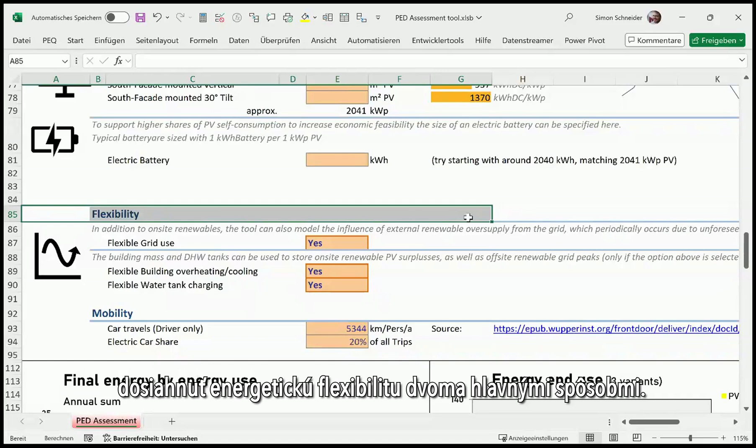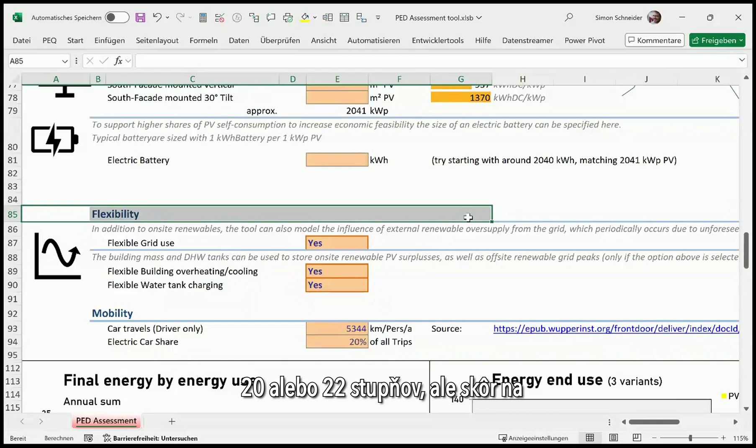So in this tool, energy flexibility can be achieved in two major ways. One is by overheating and cooling the buildings to a higher degree than would otherwise be necessary. This, for example, means in wintertime, not just heating the indoor temperature up to 20 degrees or 22 degrees, but rather heating it up to 23, 24, 25, even 26 degrees, because and only if there is an excess of renewable energy in the grid currently.

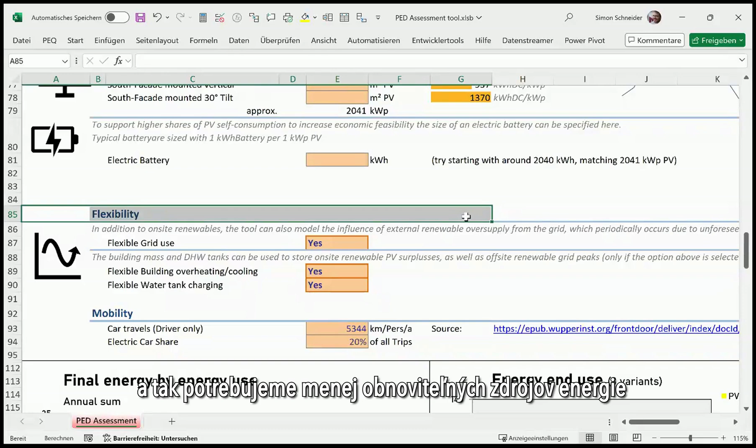Because even in winter times, there are times where it is sunny, where there's a lot of wind, where there is an excess of renewables, and we can store these excess renewables by overheating our buildings. And in summertime, it's even better because then there's typically even more renewable energy available, and we can pre-cool the buildings during the day when there's a lot of renewables available, so that we need less during night and times of lower renewable availability.

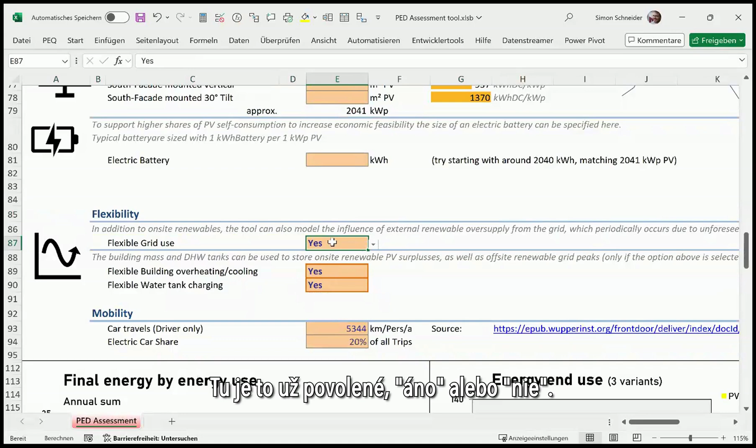The way you can use these strategies in the tool is here by, first of all, principally enabling the flexible grid use option. Here it's already enabled, yes or no. And then there's these two major strategies. One is to overheat or overcool the buildings in times of excess renewable availability. You can say yes to that. And the other thing is using the hot water tanks to increase their temperature as well if there is an excess of renewables available.

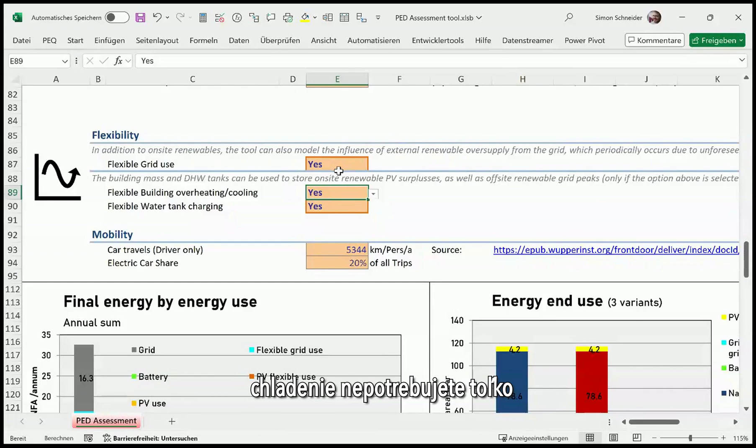Now, keep in mind, these systems only work if you have a district that uses electricity for heating and cooling, meaning if you have a heat pump based solution. If you have solutions that require district heating or even natural gas, then you cannot use grid flexibility in the same way because you don't need as much or barely any electricity for heating and cooling.

This is also why, if you include these options, you will see here these cyan colored bars that represent the flexible grid use, meaning the amount of electricity drawn from the grid only in times where there is an excess of renewable energy.

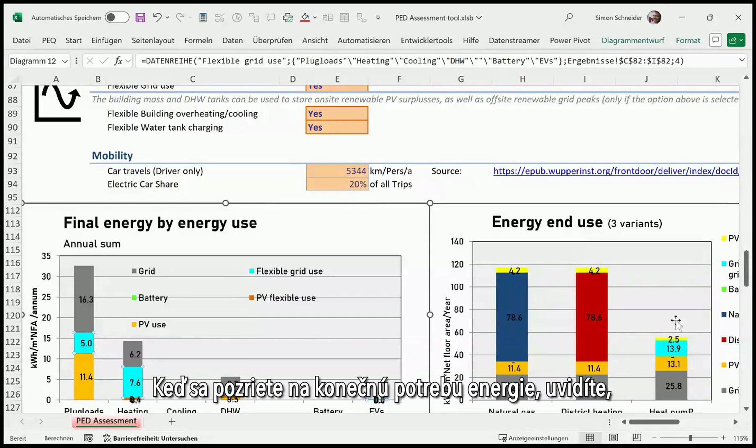And you will see when you look at the energy end use, where you have three variations and scenarios compared directly: one is natural gas, one is district heating, and one is the heat pump solution. You will see that it will only affect the heat pump solution.

And here, for example, you can see how much of an effect it has, because almost a third, or let's say a quarter of the entire energy demand for the heat pumps of the heating and cooling system of the district can come from renewable sources from the grid, which drastically improves the primary energy balance. And you can see how much effect that has.

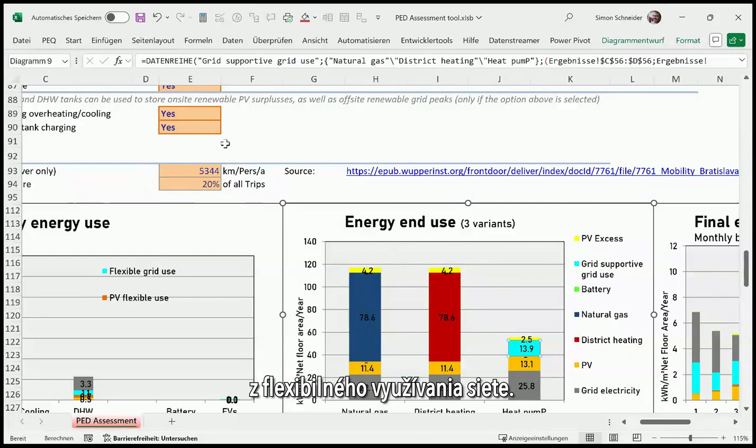So here we have 25.8 kilowatt hours per square meter of regular grid electricity, which can be rather dirty, and only 14 kilowatt hours coming from flexible use of the grid. Now, if I turn this off and rerun the calculation, you will see that the entirety of the heat pump solution will only be covered by grid electricity and, to a lesser extent, the photovoltaics. I will need to rerun the calculation though.

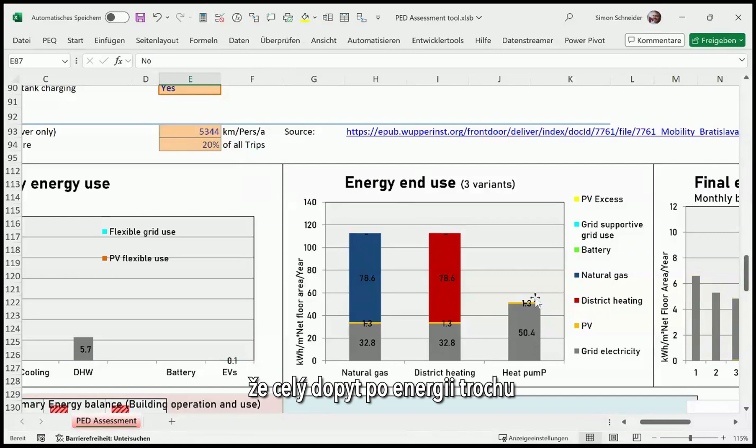And another thing you will see in a moment when the simulation updates is that the entire energy demand will drop a little bit, as you can see here. It is dropping because the downside of the flexible grid use is that when you're preheating or pre-cooling the buildings, they get a higher temperature relative to the outside air.

Imagine in the winter, the outside temperature might be 0 degrees. When you have an indoor temperature of 25 degrees, you will have higher thermal heat losses because you have a higher discrepancy between indoor and outdoor temperature. If the indoor temperature is 20 degrees, you will have a little bit lower losses than when the indoor temperature is 25 degrees. So it might be a more comfortable situation for some of the users, but it comes at a small price of efficiency.

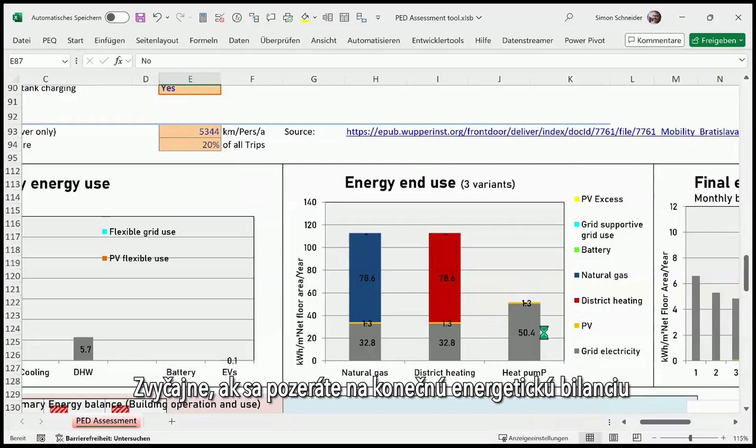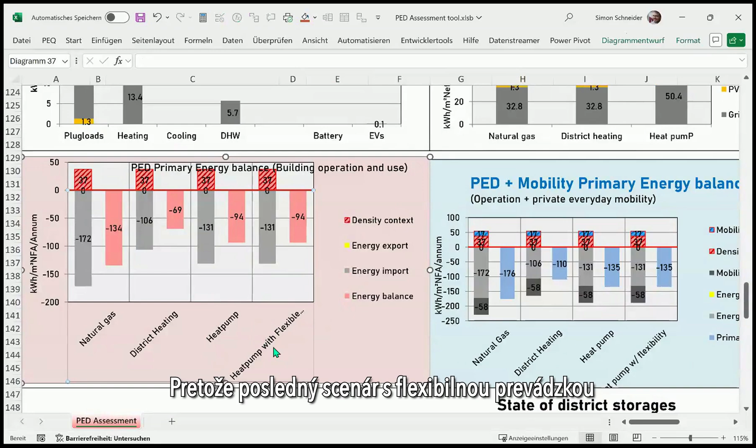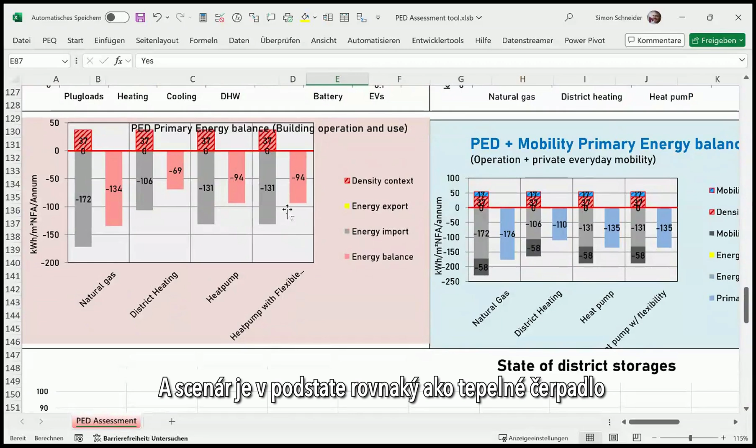And you can see here that the overall energy demand, if you don't do these flexibility options, decreases a little bit. But typically, if you're looking at the primary energy balance here, you can see now with the option unselected, the regular heat pump scenario is the same as the heat pump with flexible operation, because the last scenario just means it also considers demand side management and flexible operation, whether you use it or not. So if we turn this off, it is not considered, and the scenario becomes the same as the heat pump without flexibility by default.

But now if we say yes and we rerun it, you can see the difference that it makes in the final energy assessment. Because yes, we use slightly more energy, but the energy is far more renewable, and that leads to a much better overall balancing assessment and overall primary energy balance. At the moment it's the same. And once it updates here, sometimes it's necessary to save the workbook to update properly. And now you see the difference.

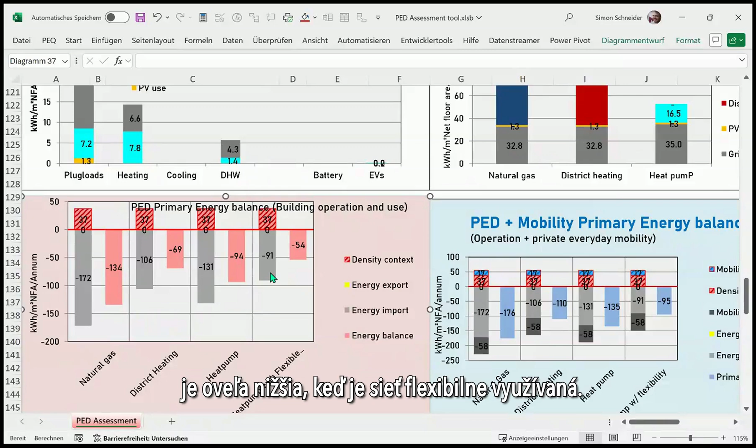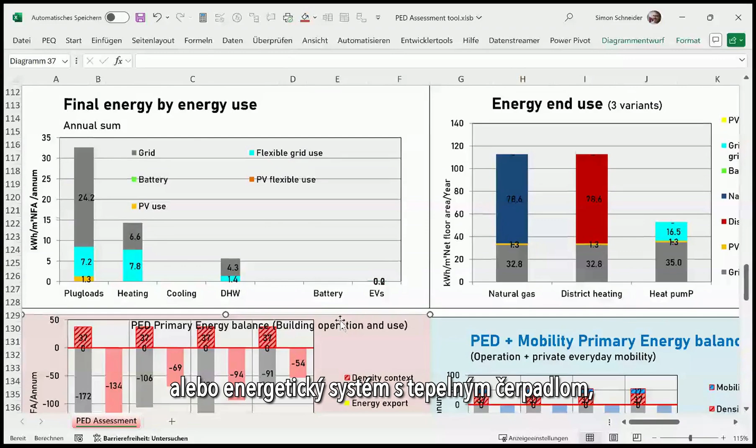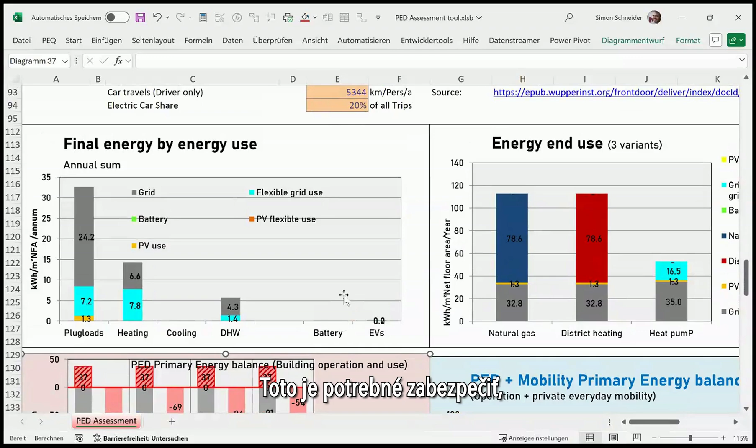It almost drops by half because the primary energy required to produce the electricity in the first place is so much lower when we use the grid flexibly. So this is one of the major impacts that we can have, but it means we need energy systems with heat pumps and a heat distribution system by floor heating or concrete core activation that can actually make use of the thermal storage of the district. This needs to be ensured. The tool doesn't model this explicitly, but if you have these options in your district, you should definitely take them.